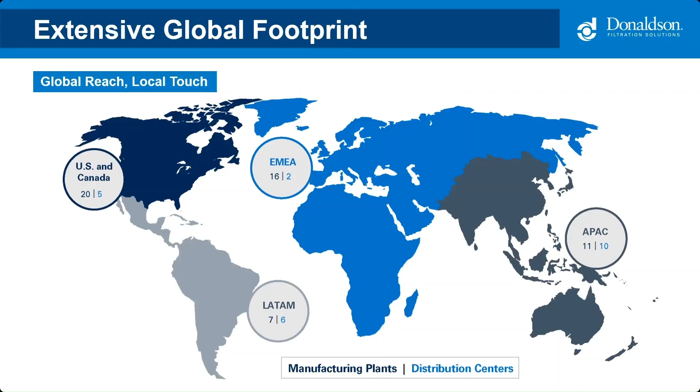Moving on to the content for this webinar, Melissa will begin by discussing the combustible dust basics and also an introduction to legislation, before I then run through a number of industry-specific case studies highlighting the challenges that we faced and then the solutions that we then provided. So over to Melissa for her section to start us off.

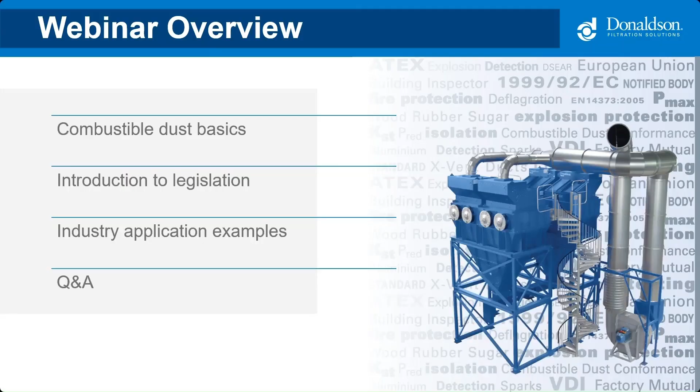Thank you Richard. So I will now explain the combustible dust basics. To start, let's talk about an explosion and what is an explosion. An explosion is a sudden release of energy that is accompanied by a buildup of pressure waves. What is important to note is that many materials can explode once they are in the form of fine dust and they are dispersed in a cloud, and besides that, there's also oxygen and an ignition source present at the same time.

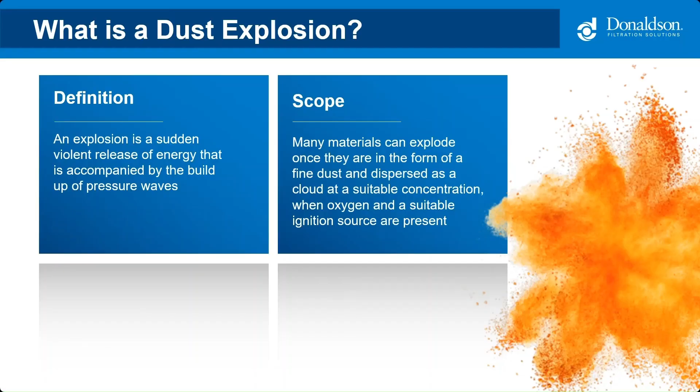So what elements do we need to form a fire? To form a fire, there are basically three components: one is oxygen, the other one is heat, and fuel. Oxygen is present in the air. For our applications, the fuel is present in the form of dust, and the heat comes from an ignition source. So if these three elements are present, we have a fire.

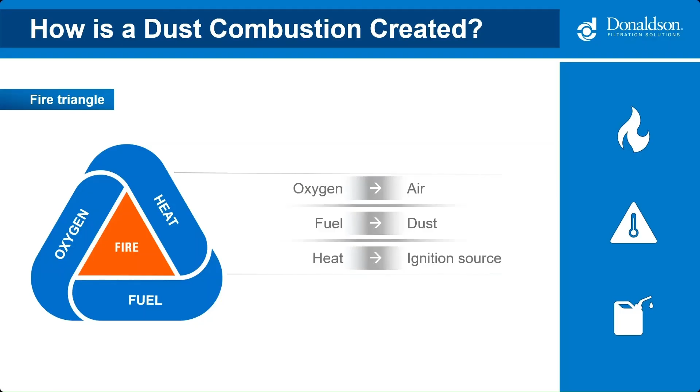But what else is needed to actually have an explosion? For an explosion, there are two additional elements that appear: one is confinement, which is given by the limited volume in our dust collectors, and the other one is dispersion, which is the dispersion of dust particles. Here it is important to mention that the dust will only be explosive if the dust concentration is between the lower explosive limit and the maximum explosive limit. So within this range of dust concentration, we can actually have an explosion, but if it's below that minimum explosive limit or above the maximum, there is no risk of having an explosion.

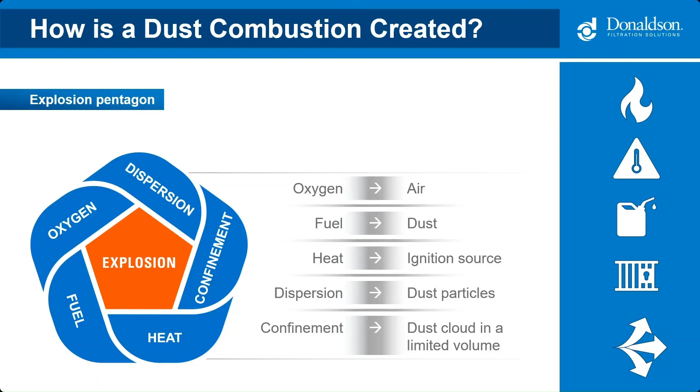How can we know if our dust will be explosive? How can we tell that maybe we should watch out for our dust?

There's a basic rule of thumb: if you extend your arm and you cannot see your hand anymore, that's a good sign that you should be careful. The second one is if you see a layer of dust accumulating on a surface, and that layer is approximately 0.5 millimeters.

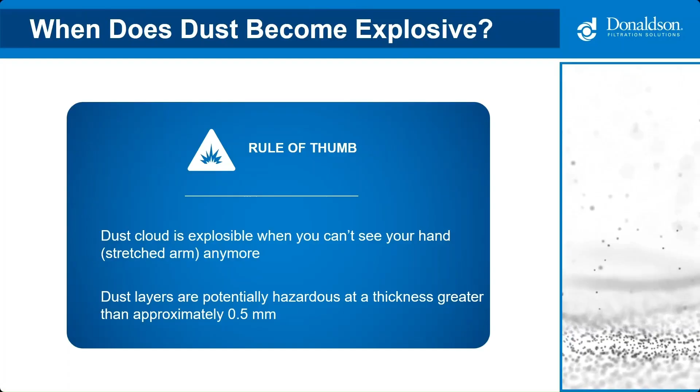Now let's talk about the explosive properties of dust. All dusts have specific characteristics that are important to know in case they're explosive. These characteristics include the Pmax, the maximum amount of pressure that can be reached with a specific dust, indicating the maximum damage it can cause in an enclosed space. This also depends on the particle size of the dust.

Then there's the KST, the dust explosion index, which measures how quickly pressure can rise. This is generally given under controlled conditions in a laboratory, telling us how fast pressure goes from 0 to the Pmax.

There's also a dust classification, and this classification changes according to the KST value. So basically, the higher the KST value, the stronger the explosion will be.

Another important parameter to consider is the minimum ignition energy, known as MIE, which is the smallest amount of energy or heat that can cause your dust to ignite.

It's also important to consider if the dust is conductive. Here it's very important to know that best practice is to have the dust tested at a laboratory nominated by an end user, meaning it's the end user's responsibility to have the dust tested. Otherwise, there's information available online, but it's always better to test the dust.

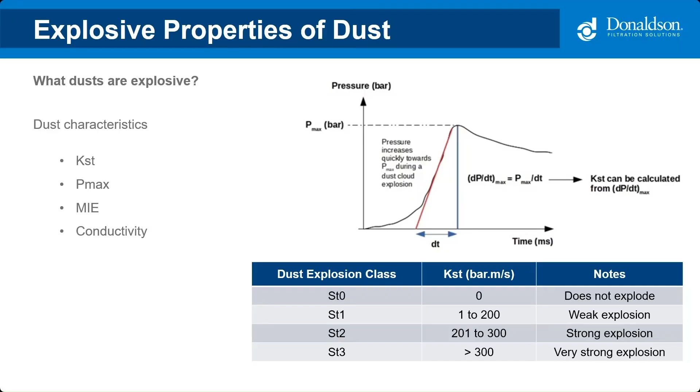So what is the role of dust collection? Our main goal is to keep the dust concentration below the lower explosive limit, because in that way we prevent fire or dust explosions, since the concentration is not enough to initiate a fire or explosion.

This also helps prevent the accumulation of dust in a workplace, because if the dust becomes airborne, it can lead to an explosion. Dust that accumulates on surfaces or corners can also give rise to secondary explosions.

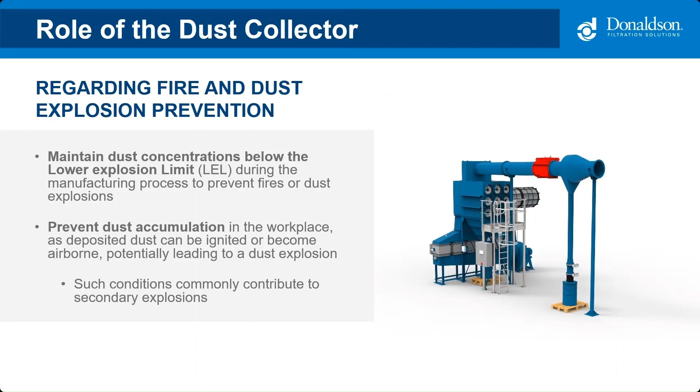So those were the basics of dust. Now let's move on to legislation.

Let's talk about ATEX. ATEX is divided into two directives: one is the economical directive and the other is the workplace directive. The word ATEX comes from the French 'atmosphère explosible,' and it is applicable all over Europe. However, many countries or customers from different parts of the world sometimes request ATEX dust collectors, so it's something that's welcome in many other places of the world.

Now, talking a bit about the ATEX directives: first we have ATEX 114, the economical directive, which applies to manufacturers and suppliers of equipment, for example us, Donaldson. It gives technical guidelines and safety directions, and one specific thing is that member states cannot require additional measurements.

Then we have ATEX 153, the workplace directive, which gives minimum requirements for improving the safety and health protection of workers potentially at risk from explosive atmospheres. This one applies to the end user or employers. It also indicates the safety demands that all end users must comply with, and differently from the other directive, member states can require additional measures here.

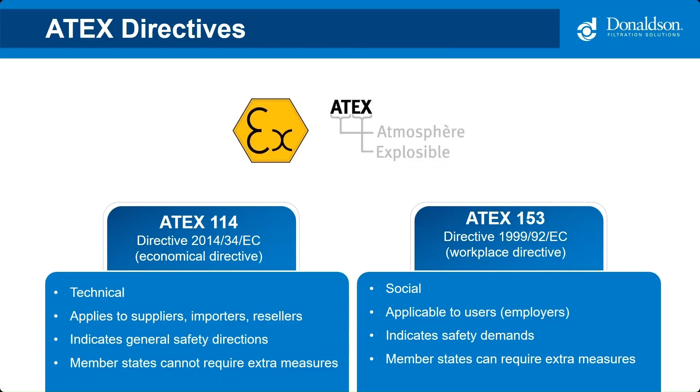Let's go a little deeper into ATEX 153, which is the one that applies to end users. It indicates that the employer is the responsible person to have the explosion protection document and to assess if there are explosion risks. This must be determined by the end user.

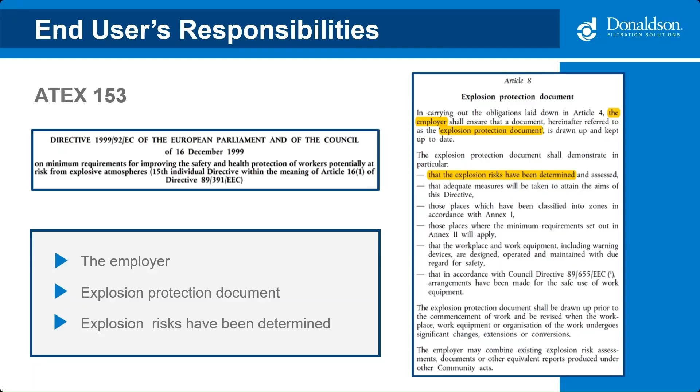Let's talk about the obligations a bit more. Zoning is a legal requirement for customers. Employers must assess the risk of explosion in their premises whenever flammable gases or combustible dust are present, and to do this they must conduct an explosion risk assessment, which is required for the workplace. Based on the assessment, all areas will be classified into different ATEX zones, and these zones reflect how often an explosive atmosphere might occur.

It's also very important to differentiate between dust and gas, since they have different zoning criteria. It's also worth noting that this applies to both new and existing facilities, and if there are changes in the facility, this must be kept up to date in the risk assessment.

And of course, the end user must make sure to keep all the information up to date and maintain the explosion prevention documentation.

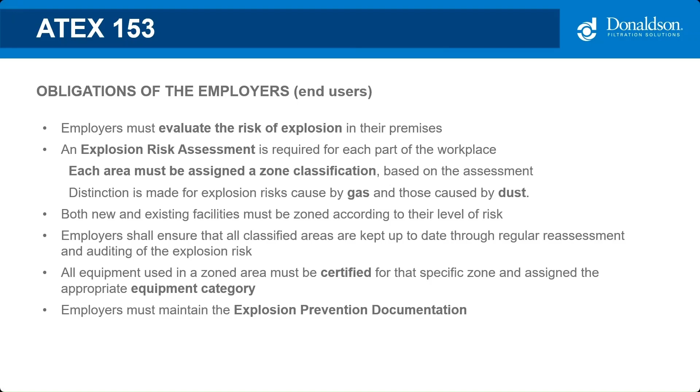Here there is an image showing the different types of zones that you can have. As I mentioned earlier, it's different between dust and gas. The less likely it is for a potentially explosive atmosphere to occur, the more we will be talking about zone 2 or 22—2 is for gas and 22 is for dust. And if it becomes very likely to occur, we will be talking about zone 0 for gas and zone 20 for dust.

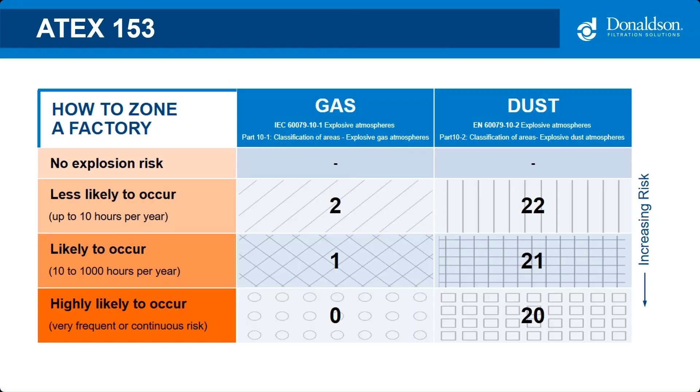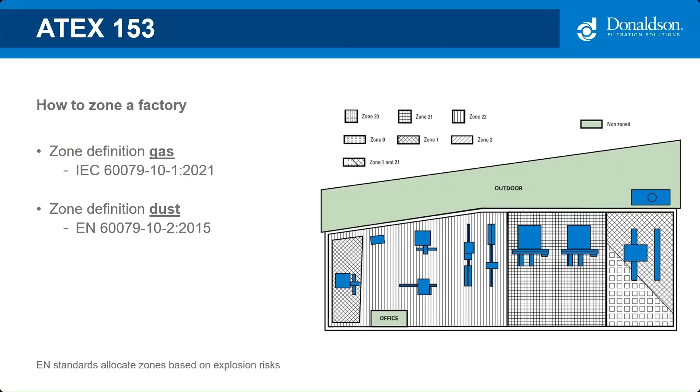Here we have an example of the zones within a factory. As you can see, in one factory you can have many different types of zones. As guidance for defining the zones, you can refer to the standards 60079-10, part 1 for gas and part 2 for dust. As I mentioned earlier, you can have different zones within the same factory—you can have no zones, or for example, zone 22 right next to an office that is not zoned. Again, this is the customer's or end user's responsibility.

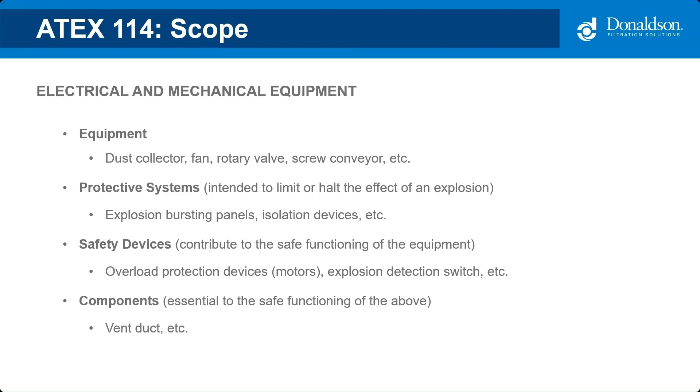Now let's talk about ATEX 114, which applies to manufacturers or suppliers. This directive gives guidance on electrical and mechanical equipment. The equipment can be, in our case, dust collectors, but also fans or rotary valves. Then we have protective systems like bursting panels, isolation devices—a little bit more on that later. This also applies to safety devices like overload protections and other components essential to the safe functioning of all the elements mentioned above.

Now let's talk about the obligations of equipment manufacturers. The manufacturer shall assess the product to determine whether it presents any potential ignition source when used in a potentially explosive atmosphere. We must conduct an ignition risk assessment and document it in accordance with EN standards. Here we must evaluate the potential ignition sources, which could be, for example, hot surfaces, flames or hot gases, mechanically generated sparks, static electricity, and even more.

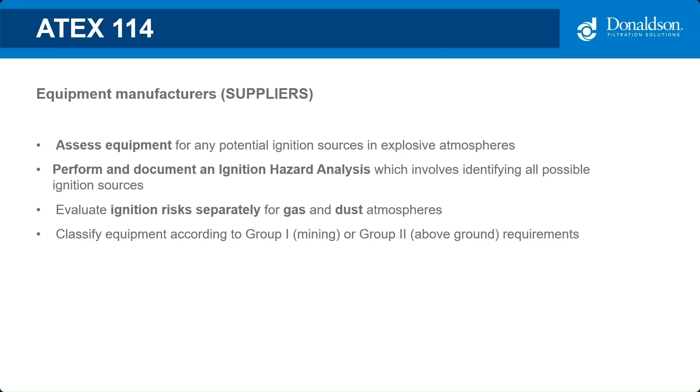Then these potential ignition sources must be classified for dust or for gas, because they have different requirements. We must also make a distinction between group 1 and group 2. Group 1 refers to equipment intended for use underground—basically mining. Group 2 is for equipment used above ground.

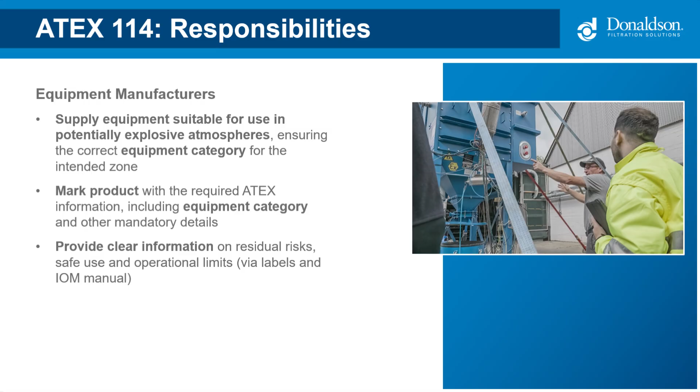So a summary of the responsibilities, for example at Donaldson on our side: we must make sure we supply equipment that is suitable for the potentially explosive atmosphere indicated by the end user—meaning our customer will come and say 'I have such a zone', and we must provide the correct equipment for that zone. We should also mark the equipment so the end user knows it is suitable for their zone. And if there's any additional information related to safety, we are also obliged to indicate this in our manuals.

So now, what is the ATEX philosophy? It's important to know that the first thing is to try to avoid creating an explosive atmosphere, because if there's nothing explosive present, you cannot have an explosion. But of course, in many cases this is not possible, so we try to remove any potential ignition sources—we look at everything that can cause an ignition and try to eliminate that. In many cases we will not be able to eliminate all the ignition sources, so we should try to avoid the ignition sources coming into contact with the potential explosive atmosphere—we try to keep them separated. But again, in many cases this will not be possible, so we use mitigation systems to limit the impact of an explosion, for example venting devices, flameless venting, and isolation valves.

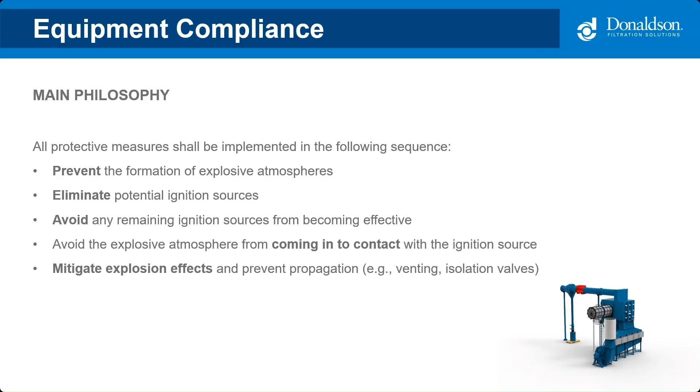Now let's talk a little more about the zones. As I mentioned earlier, the end user will indicate the zone, and we must make sure at Donaldson we provide the correct equipment category. For example, for a zone 22 dust, we must provide equipment that is at least 3D.

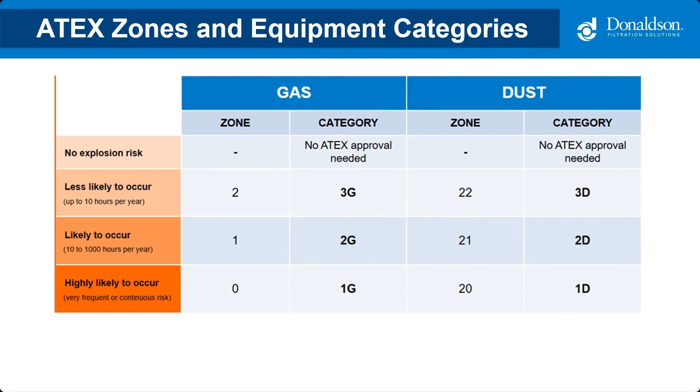Now let's talk about the marking. It is very important to mention that units will have the marking only if they are placed in a potentially explosive atmosphere, but that's different from handling explosive dust. More on that a little bit later.

Here we have an example of how the marking is created. We have the hexagon, the group 2, which refers to above ground equipment, 3D which is the equipment category, and here we also indicate the temperature class. Indicating the temperature class is important because it determines whether the equipment can operate safely in a hazardous area without igniting the surrounding gas or dust atmosphere.

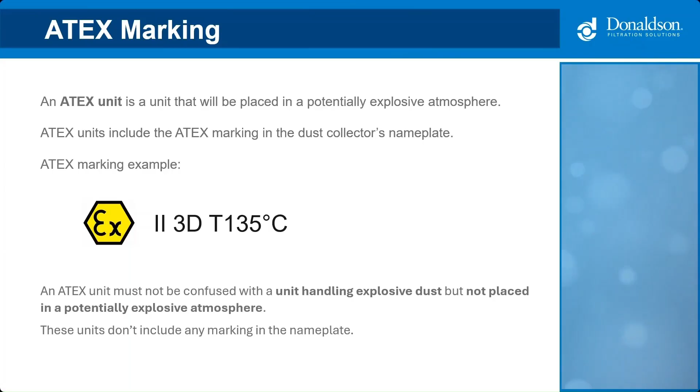Now let's see some examples. In this first example, we see a dust collector placed in a potentially explosive atmosphere, but it is not handling explosive dust. This unit will have an ATEX marking according to the zone—in this case, zone 21 indicated outside the dust collector. We must make sure the equipment we provide is suited to this, and as you can see, the marking will have the hexagon.

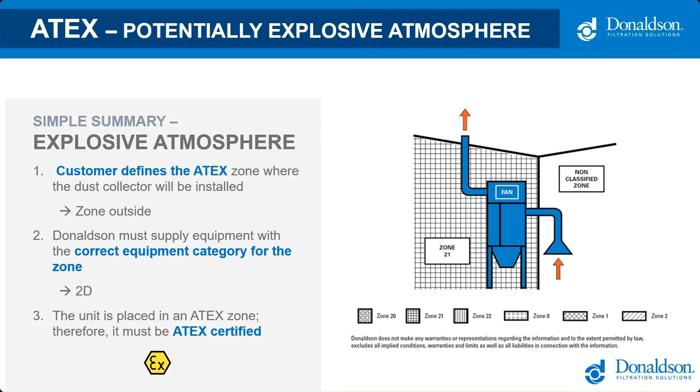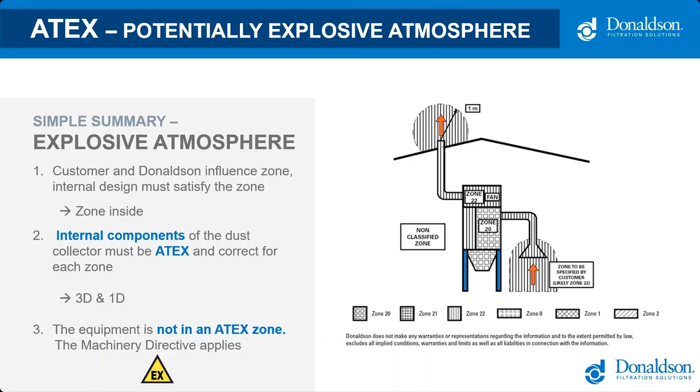Moving to the next example, here we have a dust collector that is handling potentially explosive dust, but it is not placed in a potentially explosive atmosphere. So this does not fall under the scope of the ATEX directive, but under the machinery directive. This unit will not have the ATEX marking, but we will indicate it can handle potentially explosive dust with the triangle symbol shown on screen.

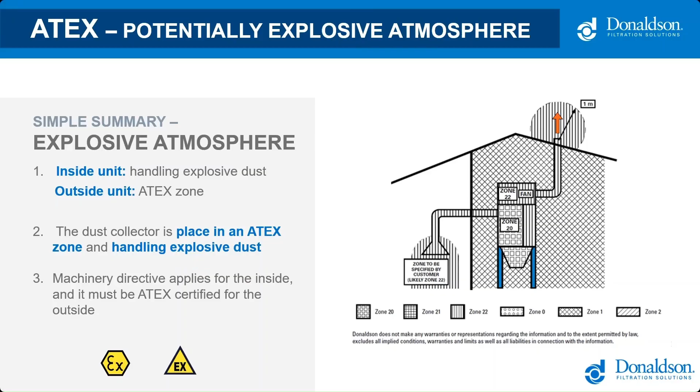Now moving on to mitigation options, because many times it is not possible to actually avoid an explosion. For that, we use these solutions to get a better outcome.

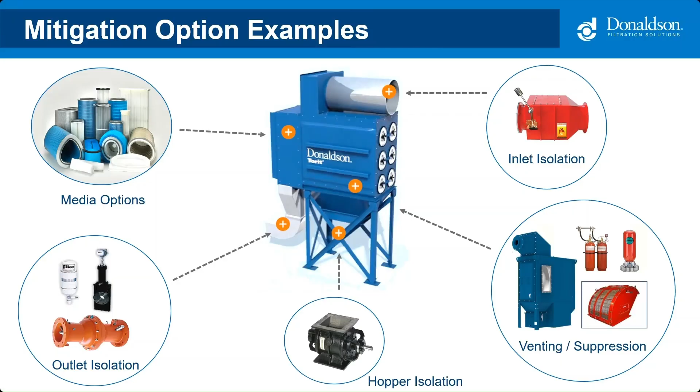So that's what I have to say about mitigation examples, but those also apply to explosions. Now moving on to industry application examples with Richard.

Thanks, Melissa. So now we've heard the technical theory behind ATEX in dust control. I'm going to run through a number of actual case studies in some of our focus markets where explosive dusts are particularly prevalent. The first we'll look at is the food and beverage industry, where the majority of ingredients used to manufacture finished goods are potentially explosive, often in the lowest ST1 explosion class that Melissa alluded to in her presentation.

Indoor dust collector installations are sometimes preferred, as these prevent the interaction of hygroscopic or moisture-absorbing dust with condensation in the ducting, piping, or dust collector. With an indoor installation, it's easier to stabilize the extraction air temperature, and the dust can be kept dry and free-flowing through the dust collection system.

In such cases, filter cartridges can be utilized rather than filter bags from our Donaldson Dalamatic range, which we tend to use for higher dust loads, sticky dusts, and these moisture-laden applications.

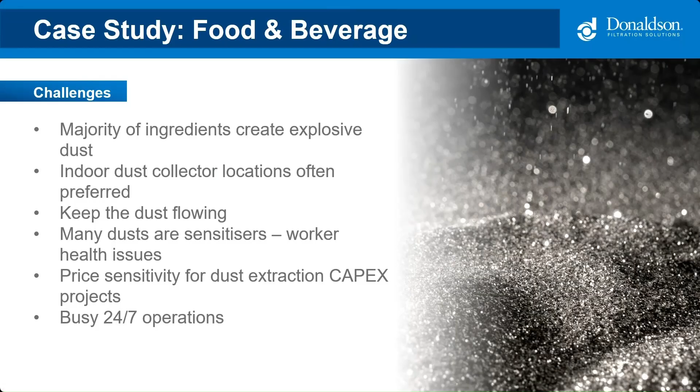Taking the first real-life case study, we're looking at a convenience food manufacturer. In this facility, there were old, non-compliant shaker dust collectors that needed replacing with current technology. The existing dust control systems had been added to over the years and were no longer working effectively. The end user's health and safety department led this project, and our initial site survey highlighted issues relating to ATEX compliance and workplace dust exposure levels.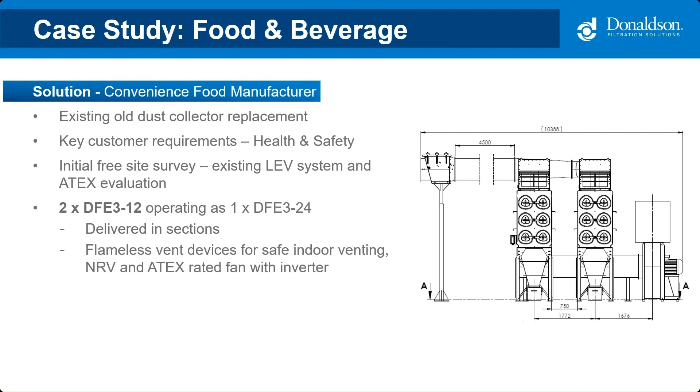The solution we provided is a Donaldson Torit DFE dust collector with explosion prevention and protection features, including flameless vents on top of the collectors for safe indoor explosion venting. To make on-site transport and installation simpler, we delivered the DFE 324 in sections. Also included was the non-return valve or back flap valve, a floor-mounted fan, and a bespoke controller with an inverter built in for efficient fan motor control.

Now looking at the next industry, the metal industry and engineering environments in general. Here the challenge is focusing on explosive metal and alloy dusts, some of which take us into the higher explosion dust class of ST2. These metal dusts include materials such as aluminium, iron and titanium, for example, and all of these carry a dust explosion risk.

These dusts are generated from numerous well-known processes such as thermal cutting, with laser or plasma torches, finishing operations such as polishing, grinding, linishing, and also thermal spray, where a metal powder or wire is superheated and added to the surface of another component. Some of these processes produce hot material and sometimes sparks. This material must be prevented from entering the dust collector and creating an ignition source or fire risk that we're trying to eliminate.

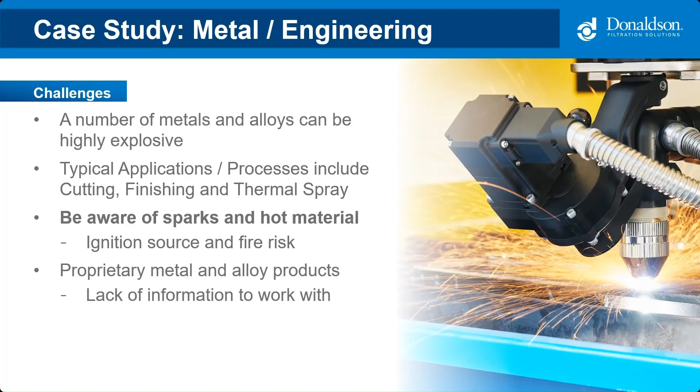Looking at this particular case study, this was a project with a global aerospace manufacturer, who have very stringent guidelines for health and safety demands, both on the specification of the dust collection system and the installation. We were dealing with a metal alloy which was tested on our request, and that dust explosion data led to much lower than expected results, resulting in a big saving in the level of explosion protection equipment we had to provide on the dust collectors.

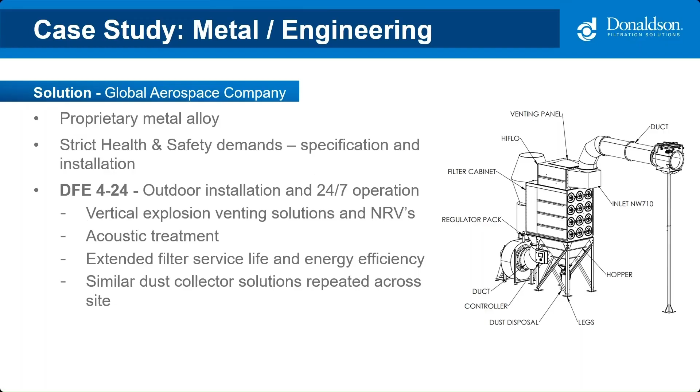You'll see in the picture a Donaldson DFE 424, installed outdoors with standard vertical explosion venting, as well as the non-return valve, all rated for metal ST1 dusts. Again there was a floor-mounted fan and inverter-controlled motor. What we were able to achieve with this project was really good filter service life and energy cost savings, and particularly in comparison with the performance of that solution versus other dust collectors on site, that enabled us to work consistently on subsequent replacement projects.

Now looking at the pharmaceutical and chemical industries. We group these together typically because in most instances we're handling very similar, very explosive dusts, usually in the ST2 range, but occasionally creeping into the ST3 range. These dusts can also be very toxic and require containment solutions to prevent significant exposure to the operators themselves.

Often we have very limited space in which to install the dust collectors, being sited within very congested plant rooms, so a compact solution is often really important. We also have to consider the addition of potentially explosive solvents or gases in the extract air, and when combined with explosive dusts, that can create a hybrid mixture. In these instances, we have to take extra care and work closely with our explosion prevention and protection equipment suppliers to configure a very specific dust collector solution.

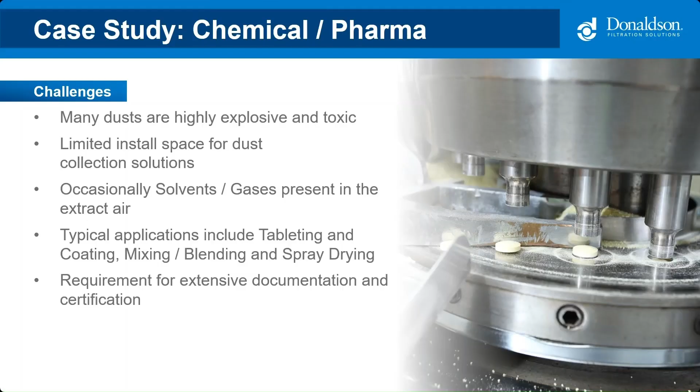Some typical processes that we'll come across within these industries include tableting and coating, mixing, blending, and spray drying, for example. Here, the certification and documentation requirements for such projects are very extensive. We have to really rely on all of our technical resource and experience gained across many years dealing with such projects in this industry.

The case study we can see here was for a pharmaceutical customer. This company was processing very fine APIs, or active pharmaceutical ingredients, which had a tested ST2 dust explosion class. This site had very strict safety requirements for the handling of this product, stipulated by the company's environmental health and safety department that we worked closely with. There was also a site insurance provider involved, to ensure they were happy with the solutions we provided.

With the proposed dust collector installed outdoors, it was decided that a chemical suppression system was still the safest option because of the toxic nature of the dust. The aim of these suppression systems is to prevent an explosion from propagating through early detection. Along with the containment features, such as the bag-in, bag-out filter change, we ensured that the toxic dust couldn't escape into the surrounding area.

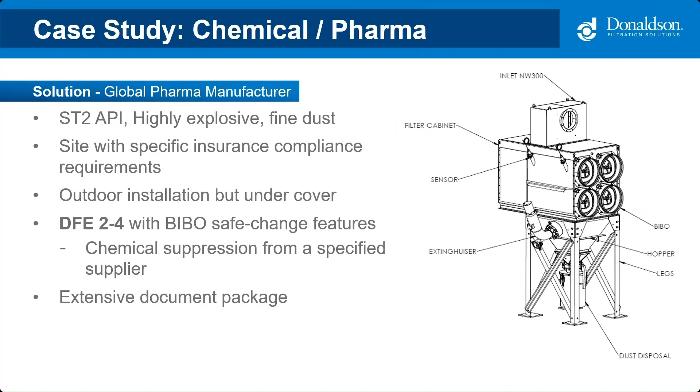Moving on now to the next case study, in the waste management and recycling area, we come across some very unique challenges. We find ourselves again in very busy, often continuous manufacturing environments, not only with dust explosion hazards, but also considerable fire risk. That's coming from the stockpiling of materials, and also the handling and unknown consequences of batteries and the ignition sources they can create.

There's also a very diverse mix of materials being handled on these sites, and once processed, these materials generate both dust and fibrous material. Although the fibers themselves cannot create an explosive atmosphere, the combination will still require a reinforced dust collector with explosion prevention and protection features, particularly if that dust is explosive. The dust really becomes explosive during the filter cleaning cycle, where it's blown off and can create a greater concentration inside the dust collector.

The fibers themselves can combine together and create blockages in more typical cartridge and baghouse dust collectors. So we have a very specific dust collector design which we're able to implement in these situations. The sites are also very tightly controlled in terms of the limits set for emissions, both in the workplace and to the external environment. Sometimes we also have to consider noise restrictions on the equipment if these sites are in close proximity to a residential housing development, for example.

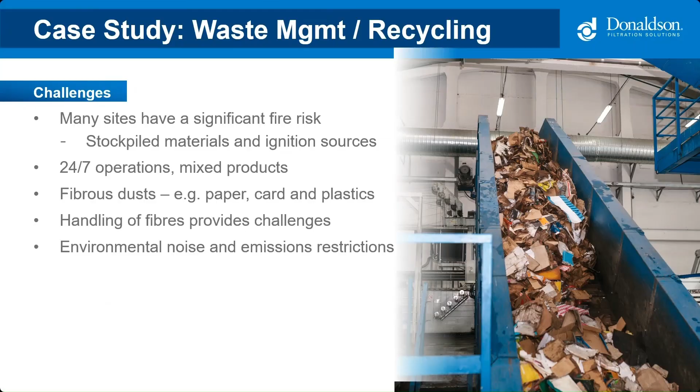Now looking at the solution we provided, this time on a car recycling plant, all of the challenges we mentioned were applicable. Here we're handling a mix of explosive dusts, but also fibers. So the optimum solution was our PowerCore dust collector, which you see in the drawing there. This unit comes complete with the PowerCore filter packs, which are able to deal with both the dust and fibers, and the filter media involved really helped significantly reduce the emissions to atmosphere compared to the previous bag filters in operation.

The roof-mounted fan is an acoustic fan box, and there's a rear-mounted flameless vent, used because a safe area for standard explosion venting couldn't actually be found in this instance. Due to the bulky nature of the dust and fiber mix being generated once we'd collected that airborne material, we provided a large capacity bin, which made waste product disposal much simpler and a less frequent operation for the workers.

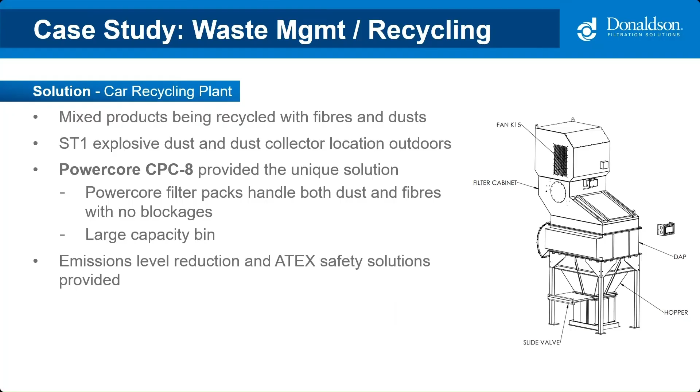Now moving on to a more unusual industry that we've grouped here in the final case study, this involves a group of materials known as composites, which are becoming increasingly common due to advances in materials technology. They consist of combinations of a variety of materials, including plastics, carbon fibre, glass and resins, and this combination can give a very strong but lightweight material with very useful engineering properties.

Composites are often found in transport manufacturing, namely aerospace, rail, marine and automotive. It's here where the properties of strength and lightweight nature can give the most benefit. As such, these components being manufactured can be quite large, so trying to capture the dust from source can be really challenging, even if you're using flexible arms. The dust generated can also be very fine, explosive in nature, typically ST1, but also carcinogenic.

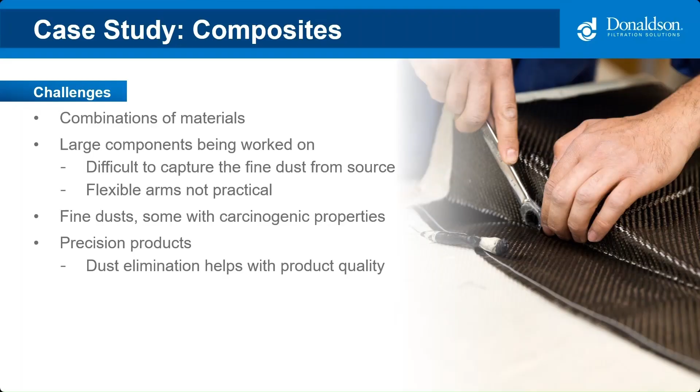So the last example we show here is the Donaldson ECB, or Environmental Control Booth. We installed this within a rail component manufacturer that were making very large component parts. This ECB provides a very large and comfortable environment for the operators to work in.

There are ATEX rated lights inside the booth for excellent visibility, and with no need for flexible arms, the operators can focus on the job in hand rather than having to move flexible arms into the required positions, for example.

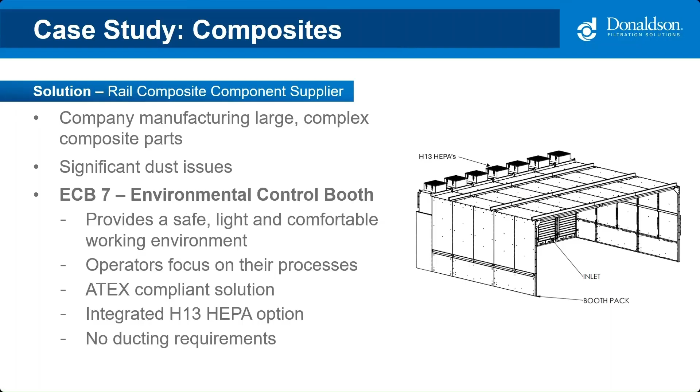Some of the key takeaways should really be related around the ATEX compliance, and that really is a shared responsibility, which entails the sort of safe design, correct equipment selection, and also the proper operation of the dust collectors in particular.

Understanding the zoning is really critical, and correct classification will then help drive the right technical decisions being made to ensure that whatever is installed is compliant through every level, every particular component part.

Explosion prevention should always come before explosion protection. The more we can prevent a dust explosion from occurring, then the safer that system in operation. But then, as the background safety measure, all of the protection measures can also be in place to ensure that system is compliant, as we said.

A really important point is that manufacturers, so that's Donaldson, suppliers of equipment and components that we use, installers and end users, and a mix of those we have attending the webinar today, everybody's got to work together. It's very much a collaboration, and by collaborating and providing all the information that we need and the risk assessments, we can ensure that installations and workplaces become a much safer and compliant place, and very sustainable for the future.